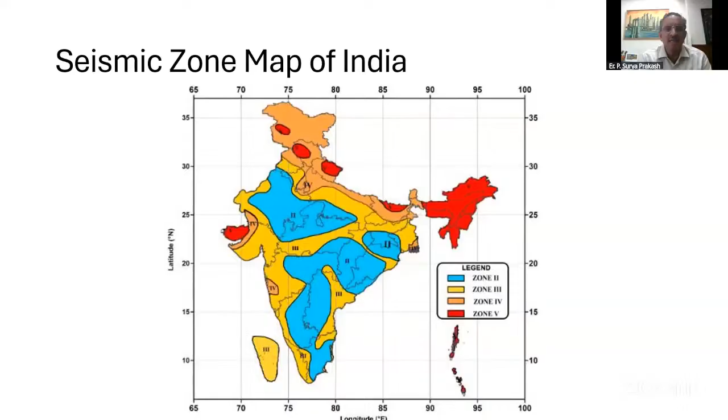So this is the map of our Indian subcontinent showing the seismic zones. If you see, particularly the northeast, the entire northeast is in zone 5, and part of the northern regions is zone 5, and also the majority of the northern region is zone 4. These are the seismic zones we have to consider in designing any of these border area projects.

We have locations I'll share where there is a minus 30 degrees temperature, where we had to design for heating.

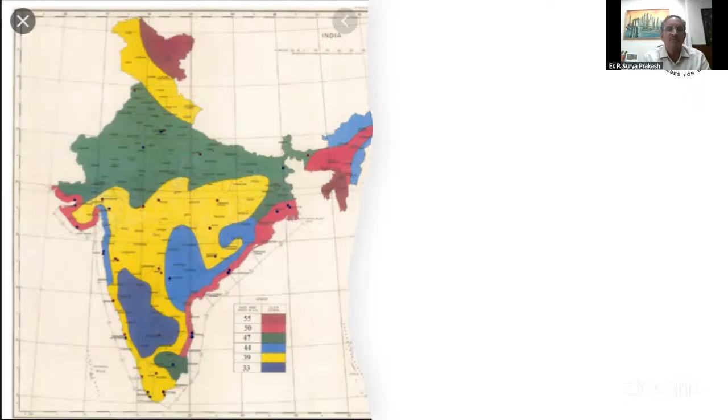As a single project consultancy, we did and delivered all these locations. We completed the project in 30 months without any cost escalation. So these are all the advanced landing grounds. I'll share the details as we move forward.

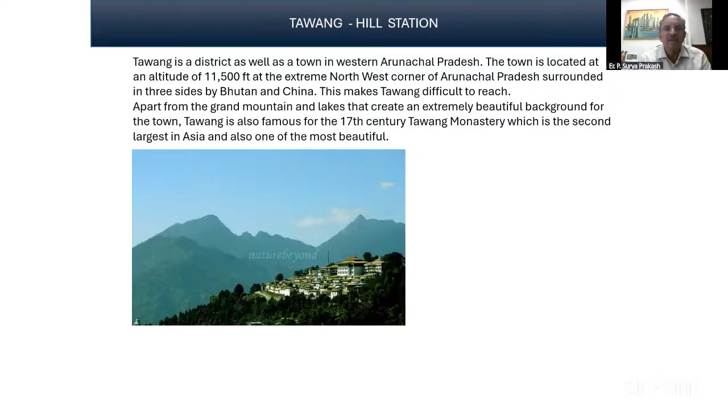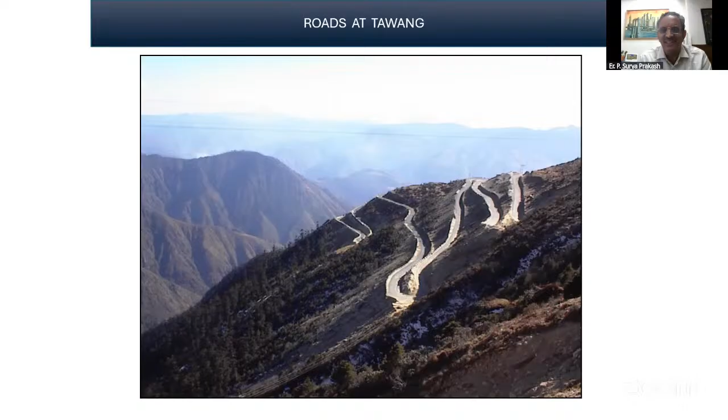And we had to do the project in this kind of access road conditions. You can see we can travel only during the day, and if you start early morning, you will reach by evening to the next location. 10 hours drive for traveling 100 kilometers is the challenge of access that we have. Most of the roads are not properly developed, and still we have to use these roads.

So this is the Tawang city. The altitude is 11,500 feet, located in the northwest corner of Arunachal Pradesh, mostly cold, sub-zero during January, February.

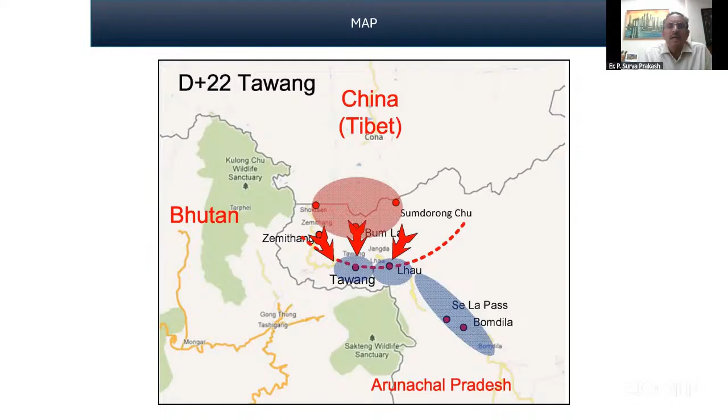This is the Sela Pass. We must have heard about it during the conflict. It gained a lot of attention, Bomdila, and these are all the places we passed through, and finally we reached Tawang. So this is the route to Tawang, which takes about 10 hours of journey.

So this is in the map, Tawang. It's not visible, sir. Oh, I think it's visible now. No, nothing is visible, just audio. Very much visible, sir. No map is visible but we are able to see that. Okay, fine. Maybe the internet is slow. Please continue, sir.

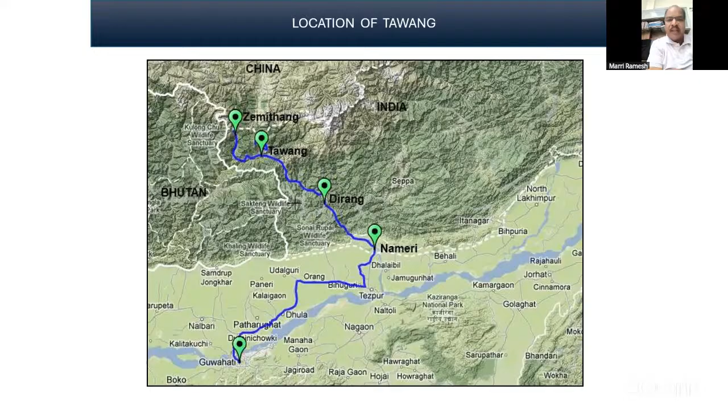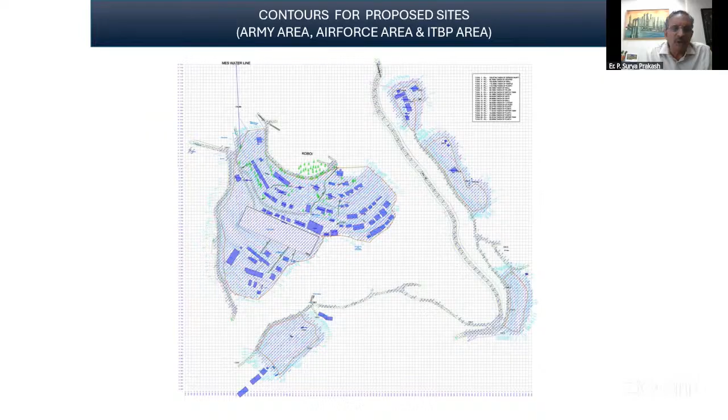We were the design, engineering, and project management consultant to implement these ALGs at Ziro, Pasighat, Along, Mechuka, Tuting, Walang, Tawang, and Vijayanagar. We prepared the DPR within the time given for all the required facilities, designing the rigid pavement, flexible pavement, and dispersals for AN-32 aircraft for defense purposes, and Mi-17 helicopters.

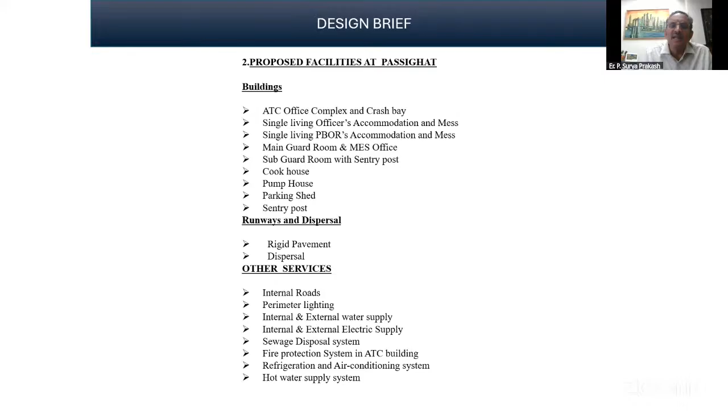We also did the internal roads, perimeter lighting, internal and external water supply, internal and external electric supply, sewage disposal system, fire protection system, and air conditioning, heating and ventilation systems.

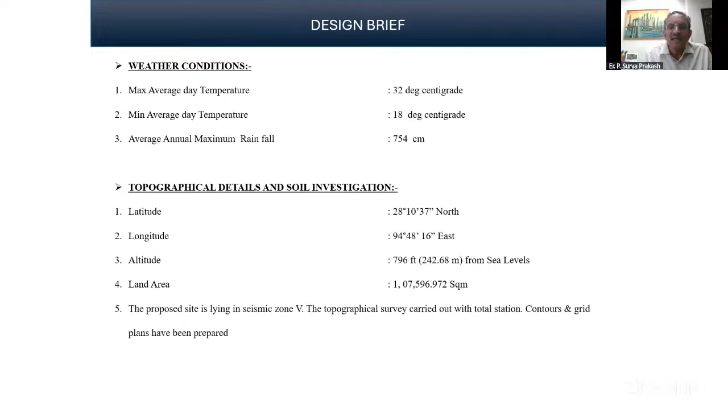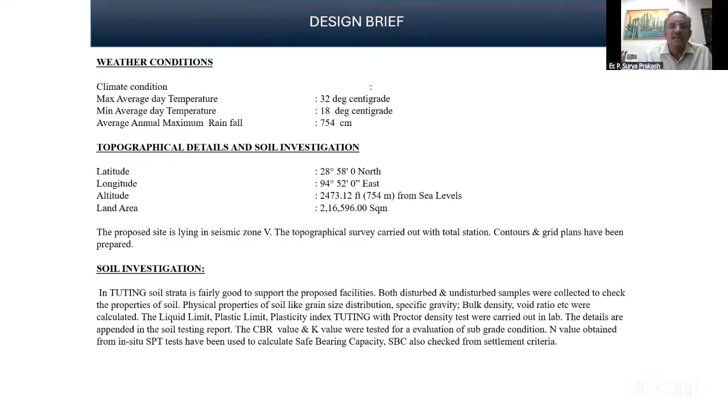Rainfall variation also mattered. The biggest challenge we faced in this project was 6 months of hindrance due to rainfall or snowfall, so we scheduled the project accordingly to ensure it commences in October, giving us a 6-month window from October to March for construction.

April to September was the hindrance period, so we scheduled the project to start exactly in October. It started and we completed it in 30 months with two breaks of 6 months each, so effectively we had 18 months for the work.

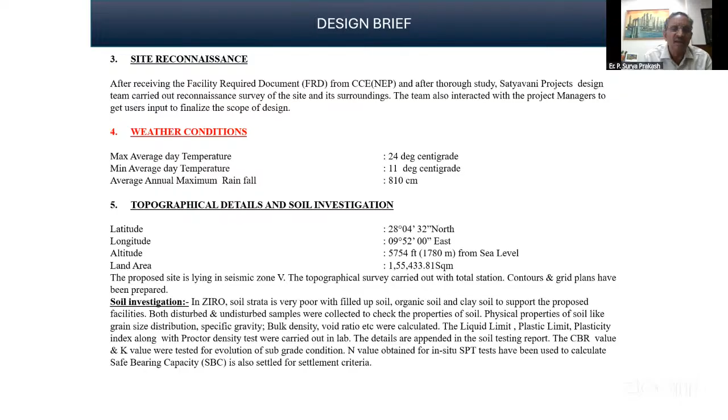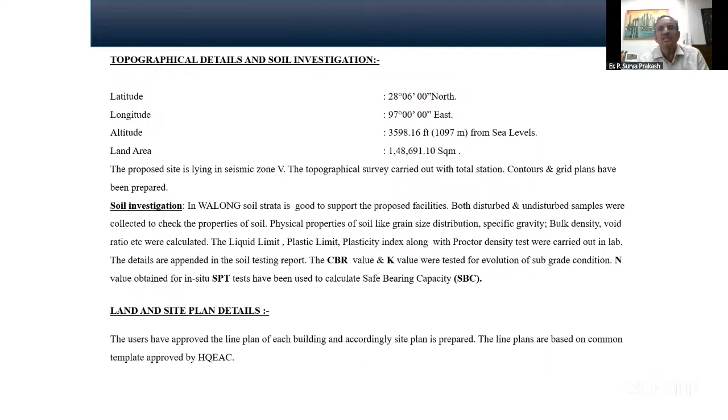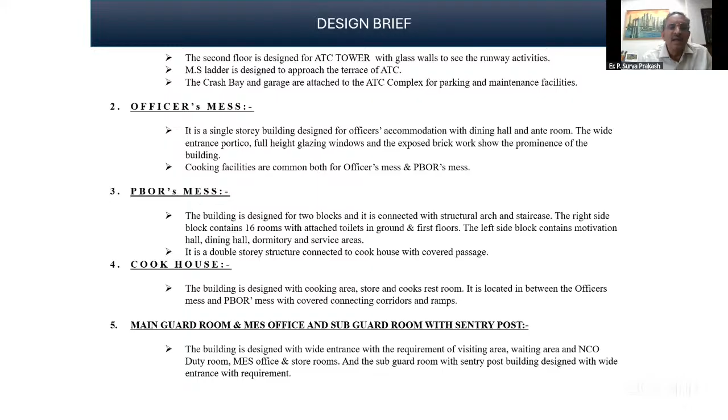These are all the drawings we have done, and this is the design brief for all 6 projects. We prepared the schedule of finishes considering these conditions.

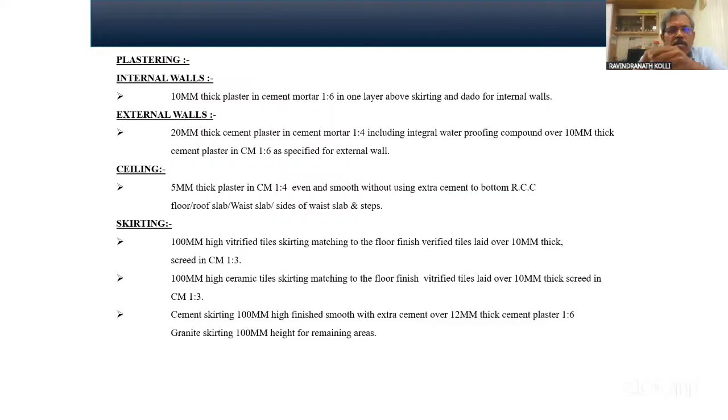So this is about... Can I ask something, sir? Yeah, please, Mr. Surya Prakash. Yeah, see, in these areas when you are working, this is a very harsh and non-regular weather. How did you manage machinery mobilization to the site and labor, especially skilled labor and technicians? How were you able to mobilize?

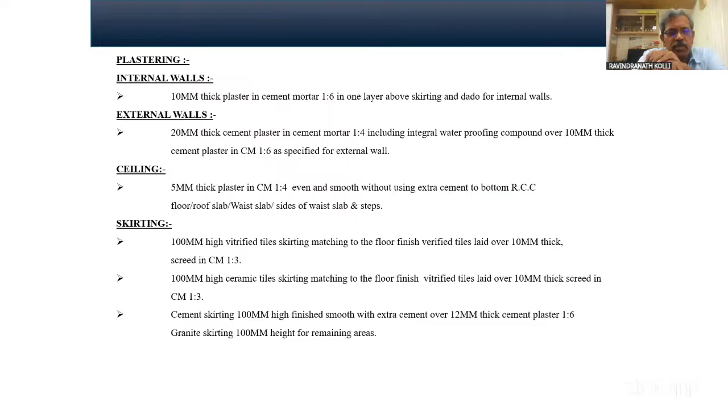That is a big challenge. We took deviation from regular MES norms and got approval during the DPR stage itself, so that the advance paid to the contractor would be paid only upon mobilization of labor and equipment. Normally if we pay 10% advance, 5% would be paid on mobilization of machinery and labor, so the labor camp also had to be developed before mobilizing labor. We had prior experience in defense projects where advance was paid but mobilization was not done, and the contractor was paying only 8% interest on the advance, which is below market rates. So we decided not to pay the mobilization advance until entire mobilization was done, and the second 5% mobilization advance was paid upon commissioning of all equipment.

Because these are all remote locations, we estimated the machinery required, including the tippers required, batching plant required, hot mix plant required, and pavers required.

All that we estimated, we provided in the tender document itself all the required equipment, and upon mobilization of all that equipment only, the advance was paid. Also in the pre-qualification of contractors, we listed this equipment for each of the 7 locations in this contract. For all 7 locations, they had to independently mobilize equipment. They cannot say they'll move equipment from one site to another. So we listed the equipment required for each site, and we insisted on mobilizing all of it, and that happened.

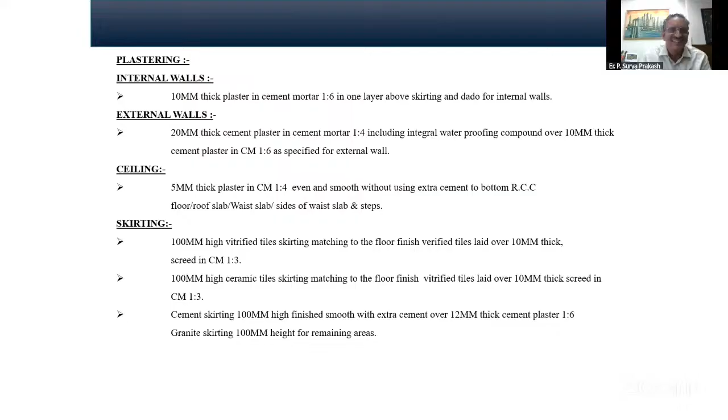Next, I'll go to the topic of coastal districts, the borders in sea areas, and whatever projects and specifications we had to follow there. Here, the biggest challenge in handling projects on the seaside is corrosion and seawater - handling the seawater, the minimum grade of concrete, grade of steel, and protection of steel against corrosion. These are all challenges we've faced, and we designed some of the projects in these coastal regions.

So in planning the projects, we have to take care of these model provisions for coastal area projects. Another big factor now is CRZ - coastal regulation zones - so we have to consider all these things while planning. Construction engineering, project procurement, and construction quality are things we consider in designing these projects, along with the built environment professionals needed for engineering, planning, design, and construction. We are still handling some defense projects in these coastal regions for departments like DGNP, etc.

These are all the considerations - location, size, feasibility, and investigation for geotechnical, topographic, and water conditions. Water is also a challenge in coastal regions because we don't get potable water in every region, so we have to test the quality of water. Power isn't a big issue in these coastal regions since they are already developed areas, unlike other borders we've handled. Waste disposal is a challenge, and stormwater disposal too. Land use, statutory bylaws, road widths, airport authorities, pollution control board, traffic, fire, RERA - these are all things we have to consider in private projects also.

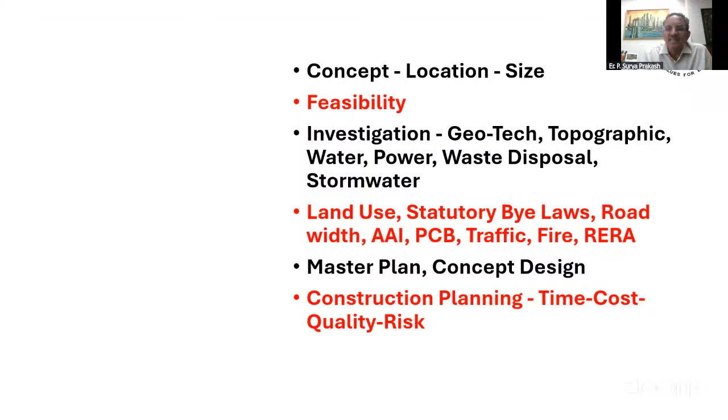Construction planning involves time, cost, quality, and risk. Exposure condition is what I was telling about in coastal regions - particularly severe exposure conditions, extreme weather conditions, and marine clays. This is another big challenge in coastal regions.

We have handled projects where if we have to fill 2 meters of earth to raise the ground level, we need ground improvement compulsorily even for filling. We have also done foundations on soil where the ground level is minus 0.5 meter below MSL - that means half a meter below MSL - where the water table is always above ground level.

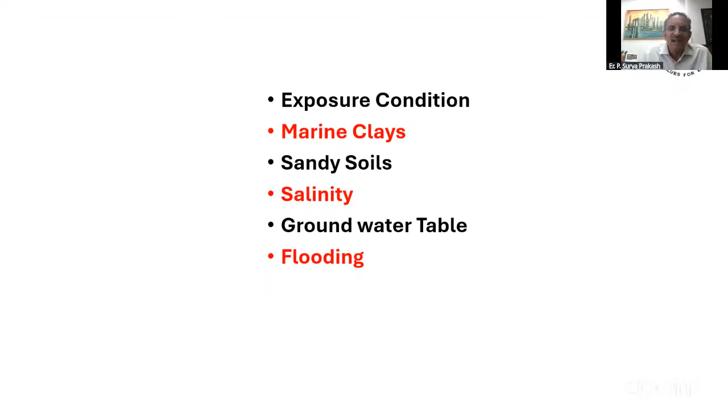So we have done the foundations in such areas, along with the salinity condition, groundwater table, and flooding of the sites. These are all the things we handled. Tsunami factors, cyclone conditions, and storm surge are other considerations.

And ground improvement, as I explained, we need PVDs for ground improvement compulsorily for these marine clays, and dewatering systems in coastal regions.

When we did projects where perennial water is in the water table, during all 365 days you will find the water table at ground level. How do we execute the project in such conditions? So we developed a dewatering system run continuously for 2 months, and we could maintain dry conditions in the soil up to 2 meters depth using this system.

And for piling, thanks to some companies, I developed the vendor for precast piles. In such soils, piling is very tough and challenging, because if you do bored cast-in-situ piles, during augering there will be a collapse, and even using bentonite it remains very challenging. So we used precast piles, driven piles, and spun concrete piles available with M80 grade concrete, which are very economical compared to bored cast-in-situ piles. We designed using those precast piles as well.

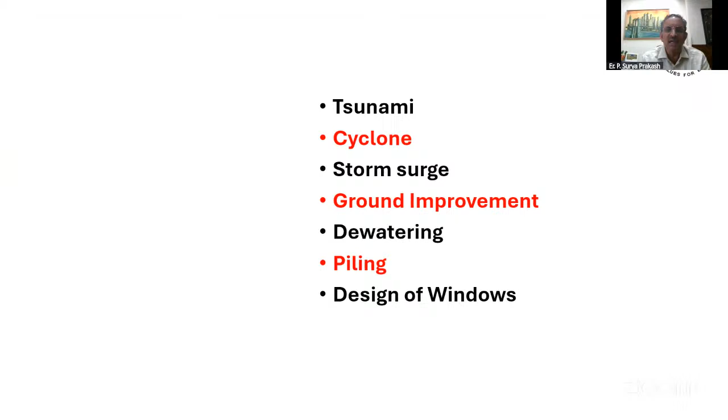Sheet piles and jetting—jetting is another method for driving these precast piles into the ocean. We deploy jetting and handle corrosion with corrosion-protective paints and ring bunds for executing projects into the sea.

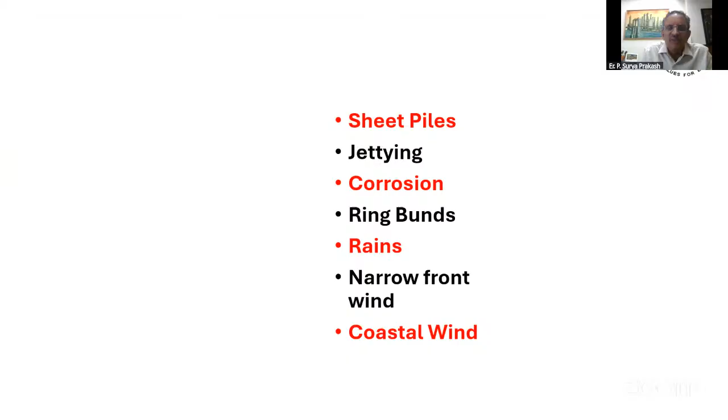Rain and narrow front wind conditions are already incorporated in IS 875:2015. Earlier we used to have a special condition of narrow front wind, and coastal wind is another factor for design of structures in coastal regions. This is the importance factor for cyclonic regions—K4 is introduced in IS 875.

The east coast of India is the most challenging coast, with the highest wind speeds, crossing design wind speeds. We saw in the Orissa cyclone where wind speed crossed 250 kilometers per hour, about 65 meters per second design wind speed, where we designed for survival, not serviceability. Survival wind speeds were specified even at 250 kilometers per hour, and we designed structures for survival at that speed.

On the west coast, Gujarat is the most vulnerable, for both earthquake and wind. We have done structures on the west coast for 180 kilometers per hour cyclonic wind speeds and zone 5 earthquake conditions.

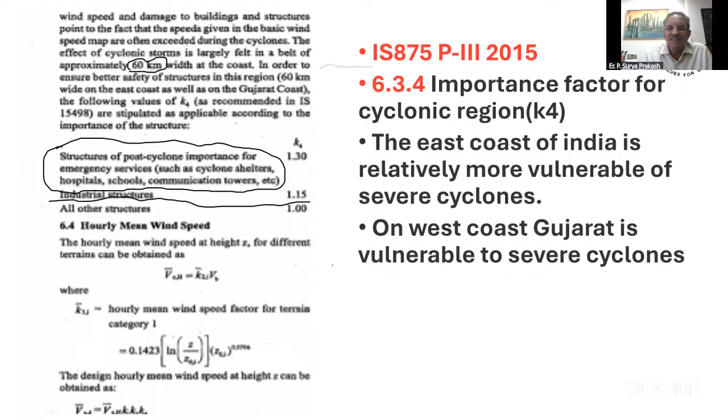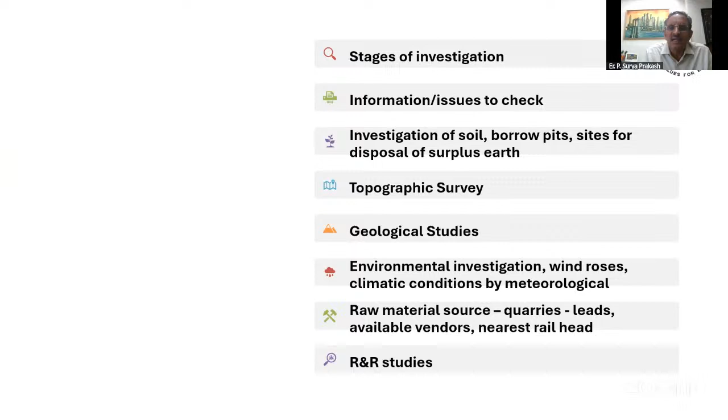For investigation, we do desk studies first for any project. Earlier we used to do reconnaissance walkover surveys; now we do desktop Google Earth studies to understand conditions in and around proposed project locations. We also conduct online surveys for raw material sources, quarries, and leads by checking Google Earth. For important projects, we do geological studies, environmental investigation, and study wind roses and climatic conditions—these are sample wind roses.

Sir, I have one point here—you mentioned geological conditions. You may be given a project to execute, but before the geological survey of those conditions, do you bid for it, or do you first assess the geological condition of the area and then finalize? There are certain important projects, and how you execute depends on this, because it's a problem in border areas too—very high altitude and very unstable ground conditions. As you said, in coastal areas also there are unstable ground conditions, a very tough thing. So do you survey geological conditions first, and based on that take up the project?

Exactly—in fact, we have to check the feasibility of the geology for very large projects like dams, or caverns where crude oil is stored, and power plants, whatever we do in border areas; we have to go for geological study as part of the investigation. We have to see the geological history of the site, and we have geological experts who give the report for the given location. Based on that, we proceed. We are aware of the Koyna earthquake and why it happened—the Koyna Dam was built on a fault line, so that should not happen. That's why the study of geology is very important for all important projects we do. It's part of the environmental impact assessment studies, taken up much before the project planning itself, and based on those reports, we do the planning.

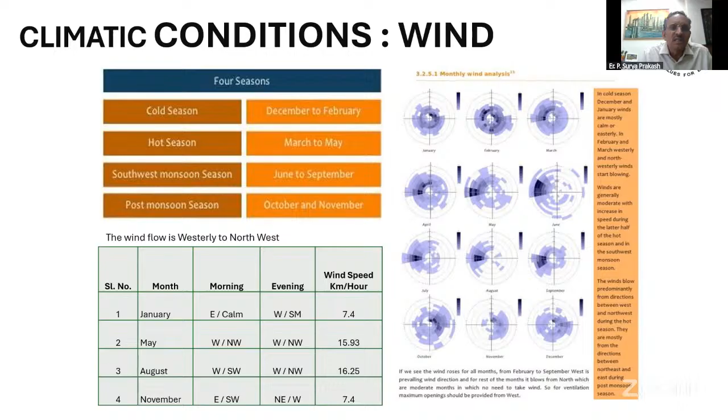In one project we had a geotechnical investigation report which suggested 75 tons per square meter. After seeing the actual rock, we decided to go again for RQD testing. When we did the RQD, we got a report of 300 tons per square meter. So it's very important to study the quality of rock and rock designation in the project.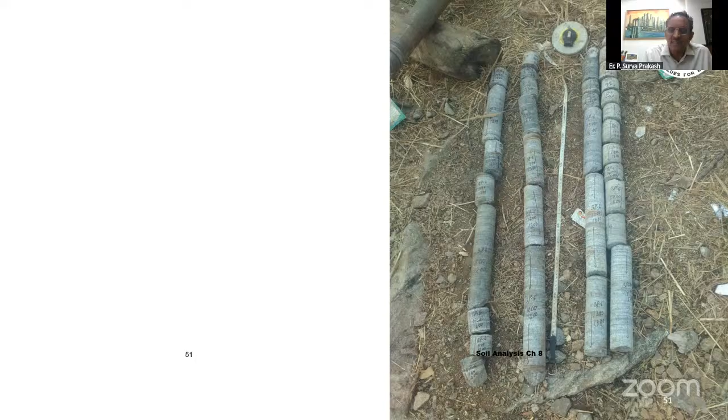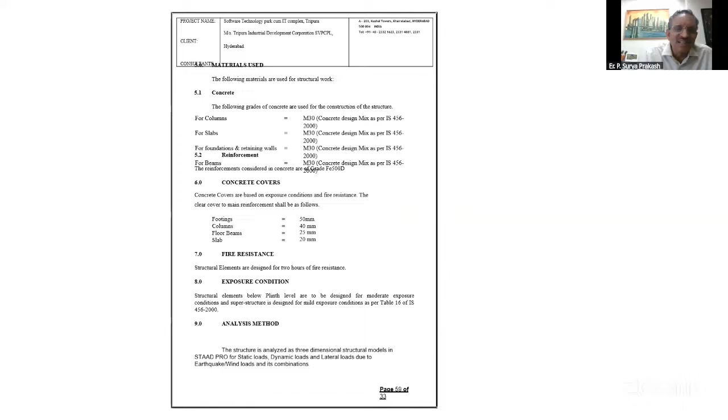So this is the structural design brief for one of the projects in Agartala, which I am just sharing. Tripura is another border state where we did a state government project. So I thought I'll share these challenges - the project delivery, solution, and investigation. If you have any further questions, you can ask from this.

So this, I have covered. Any questions, please?

The question is mainly about the challenges of infrastructure projects in border areas. Can I ask a question now? You see, in the border area projects you have taken up, regarding the geological conditions of that area, especially the borelog data and other soil strength and other things - did you use that for your work?

One is that the government itself will provide some data to you based on past projects or something - they may be having some data. As you are a private executor, they will provide you all that data before the start of the project. But do you also conduct an independent survey and take the data before, as you said - one place you did 4 inches by 3 meters, and another 75 tons per square meter, and then when you went for a second sample, it went very high. So there may be variations in the earth when you do this, especially in border high altitude areas. It's very difficult to assess and plan for the total technical job there.